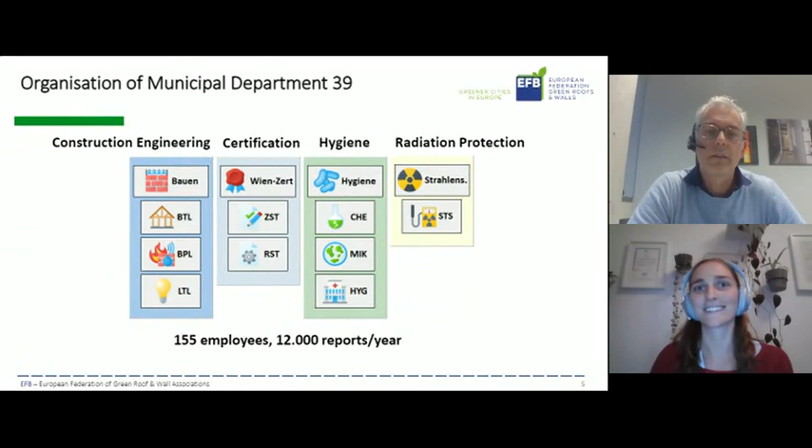I hope it's already working. Yeah, I think so. Yes, and the floor is yours now. Thank you.

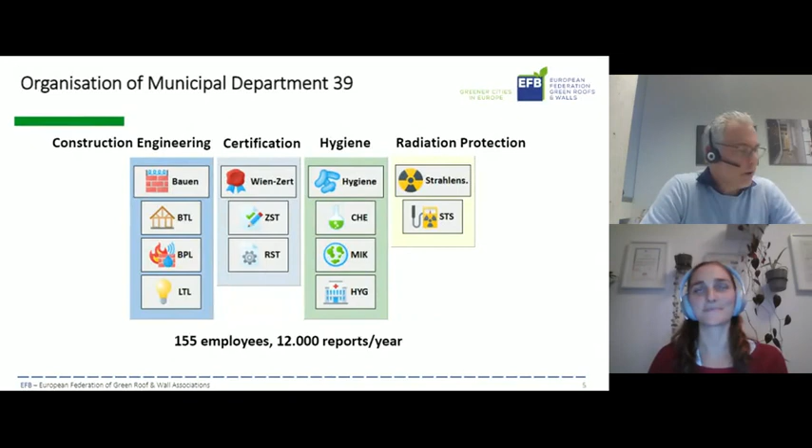Thank you, Isabella. Thank you for the invitation and the chance to talk to you today about such a controversially discussed topic like green walls and fire regulations. First of all...

I may say some sentences about my professional background, about the Municipal Department 39. As you can see, we are part of the City of Vienna administration, but I always say we are a big civil engineering bureau with a very wide range of topics and activities.

Our department is built on 4 columns. Today's relevant column is the construction engineering column, where I am the head of the building physics lab, dealing with fire protection, thermal insulation, and sound insulation - the classical building physics topics.

We also have a testing and inspection department dealing with hygiene topics, which means examining the drinking water of Vienna, for instance, or the water of the Danube. We also have a radiation protection lab dealing with radiation protection, such as X-ray apparatus, and so on.

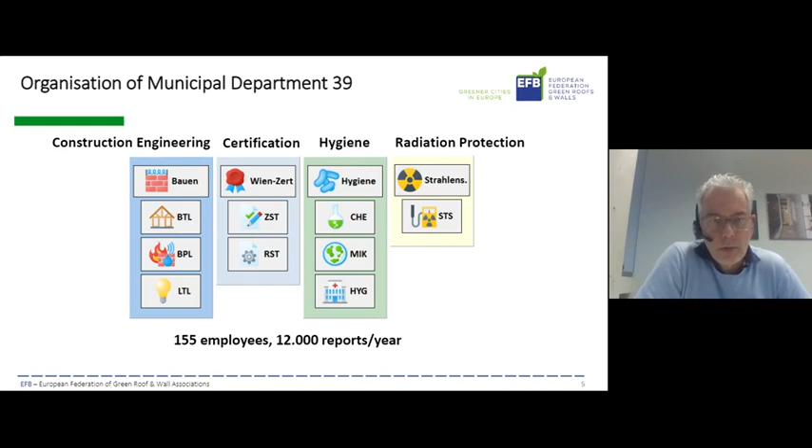So, a very wide range, and this wide range is based on about 800 different test standards, inspection standards, and certification standards. We are accredited for about 800 standards, which shows you a very wide range of activities.

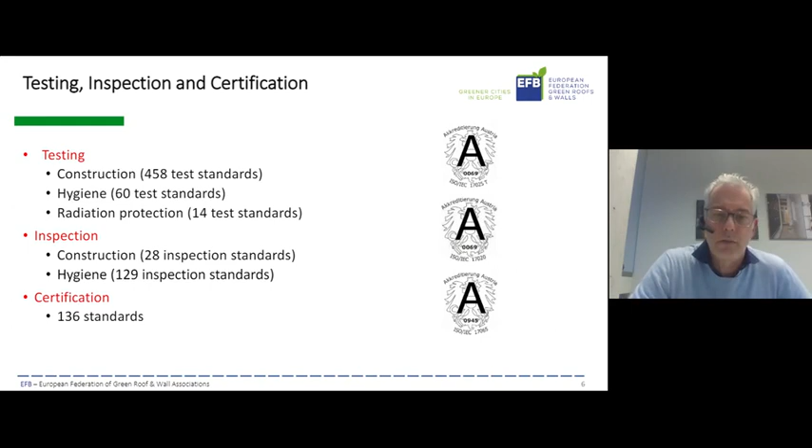Of course, a testing institute has to have a quality management system, an environmental management system, and also has to be a member, for instance, of EGOLF, the organization of fire testing labs in Europe. We are recognized as a testing institute in Germany, for instance, and we have the chairs and participate in numerous national and international panels concerning European standards and national standards.

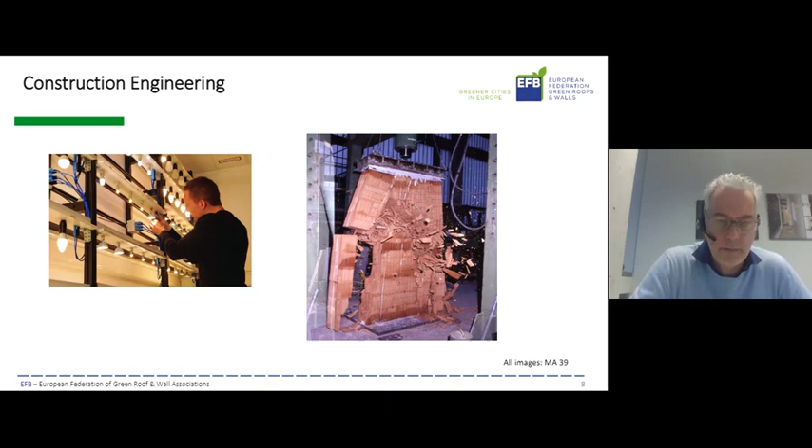Within the construction engineering column, as you have seen in the slides before, we deal with, for instance, lighting technology, the picture on the left-hand side. We deal with strength tests, the image on the right-hand side. And in my lab, as I said before, we have sound insulation, image on the left-hand side, where we test sound absorption and air sound insulation. And on the right-hand side, you see one of our furnaces in the part of fire protection, where we deal with fire resistance of building products. We also test the reaction to fire behavior of building materials.

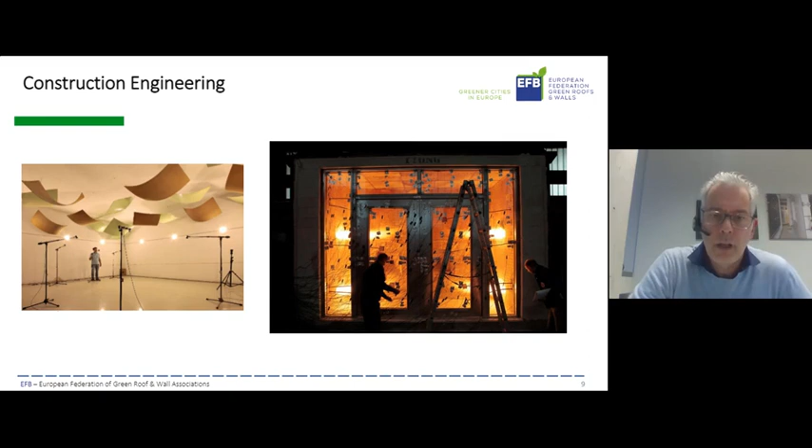Today, our topic is fire and green walls. That will be the content of the next 15-20 minutes. I will show you the history of fire tests of facade greenings in our department, the main results of these tests, and the way from the results to the development of fire regulations in Vienna.

First of all, the history of fire tests concerning green walls, facade greening. This history starts, I would say, in 2015, where the Viennese politics said we have to do something against urban heat islands, we have to do something against climate change. And one means is, of course, to green the city.

So the City of Vienna administration tried to force green walls as one means of that. And in 2015, we as the testing center were asked by the politics, what do you say about the fire behavior of green walls? So we did a short literature research.

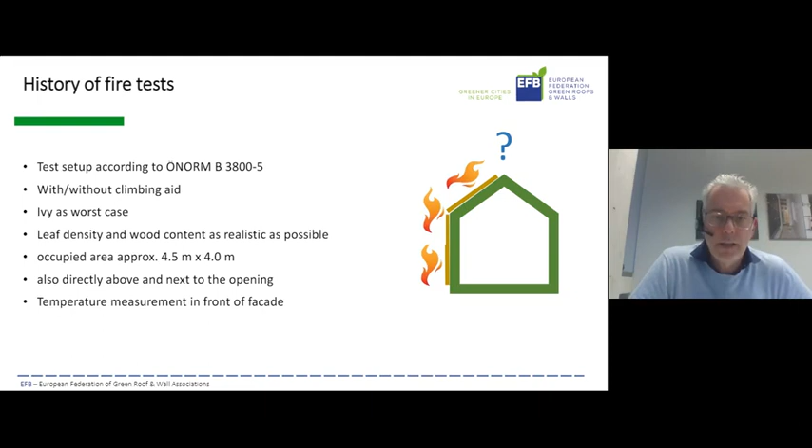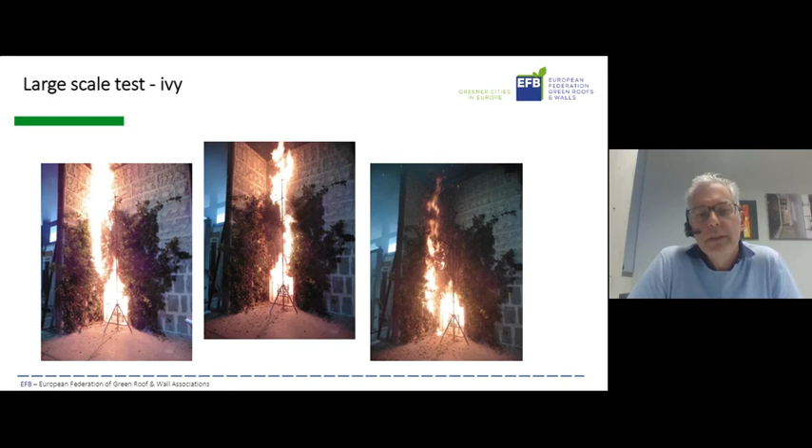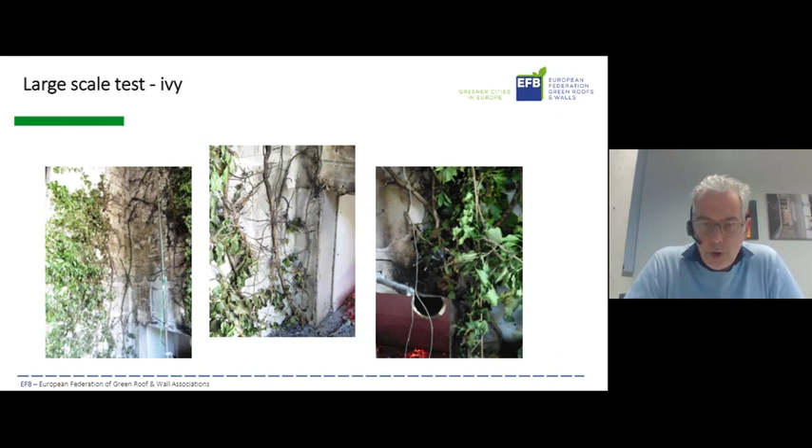So this was the first test, I think worldwide, the first test in a lab on a standard test rig. And it showed us, principally, there is the possibility of such a flashover.

So the solution was not a very easy one for the question the politics asked us, and we had to do further studies. The next examination was in muffle furnaces, some kind of small fire tests, where we put different plants, different woods, different leaves of plants used as facade greenings into such muffle ovens, into such small furnaces.

And then we did some temperature programs within the furnaces and examined properties such as smoke production, smoldering, and ignitability temperature of these plants, these woods, and these leaves.

What was the outcome? What was the result of these small tests? Wooden parts showed an ignition temperature of about approximately 570 degrees, and the leaf masses of the plants showed an ignition temperature of about 650 degrees Celsius.

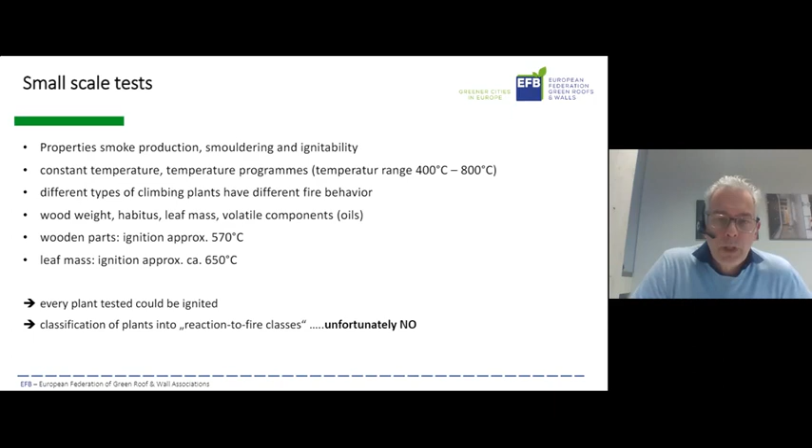So we had to go on with our large-scale tests, and we had the opportunity, with the financial help especially of the City of Vienna, to do 3 major research projects on our large-scale test rig that you have seen before.

The first package was dealing with ivy again, was dealing with plants put onto climbing aids, and was dealing with climbing aids put at various vertical distances from the fire chamber, in front of the fire chamber. You will see the images immediately.

The second research project dealt with ivy and putting in some construction fire barriers. We were also dealing with climbing aids in front of the test rig, as I said before, and we also put metallic trough systems onto the test rig to examine their behavior.

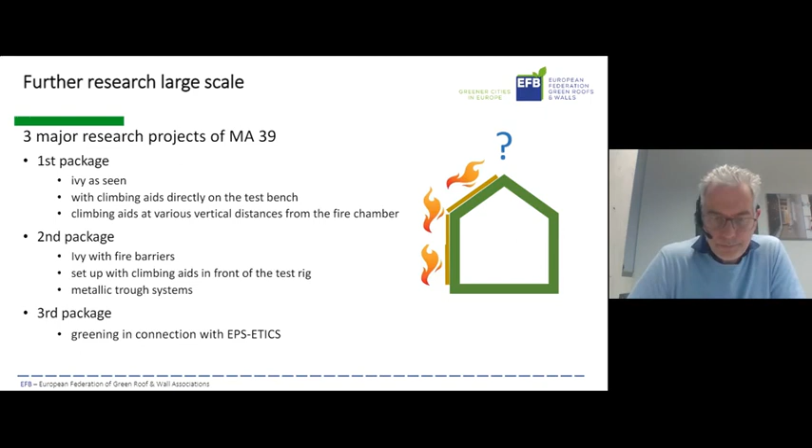And within the third package, which was done in 2021, we examined greening in connection with ETICS systems, with thermal insulation systems onto walls. So let's look at the results.

There you see some images of the fire tests with the climbing aids. Here you see the climbing aids directly mounted onto the test rig, and the plants directly onto the climbing aids. And you see a very similar behavior of the plants as you have seen before with the ivy.

There we also examined this kind of flashover I showed you before. So there's no difference between plants directly put onto the test rig and plants put onto a climbing aid. These climbing aids were made out of steel, and these climbing aids were put onto the test rig. So nearly the same behavior.

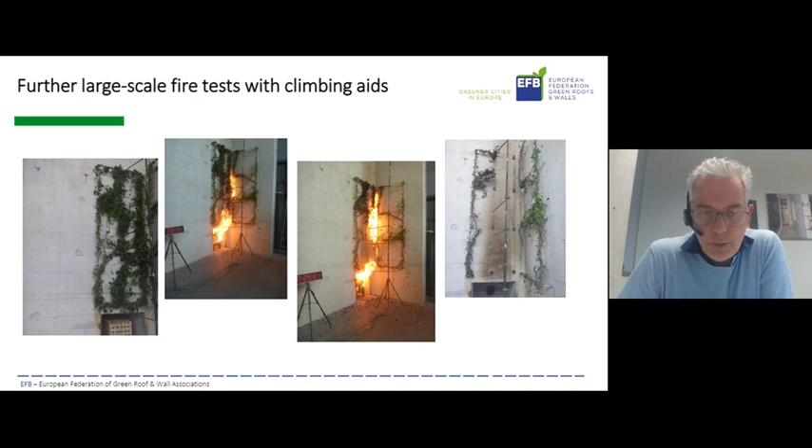Afterwards, we put the climbing aids away from the fire chamber. On these images, you see the climbing aids beginning 1 meter above the fire chamber of our test. You see in the middle the flame of the wooden crib, and the flame now doesn't reach the greening. We do not reach the temperature I've shown you before of 500 to 700 degrees Celsius, so we have no problem with fire propagation or ignition of the greening. Putting away the greening from possible fire loads is one means to possibly fulfill the fire protection goals on facades.

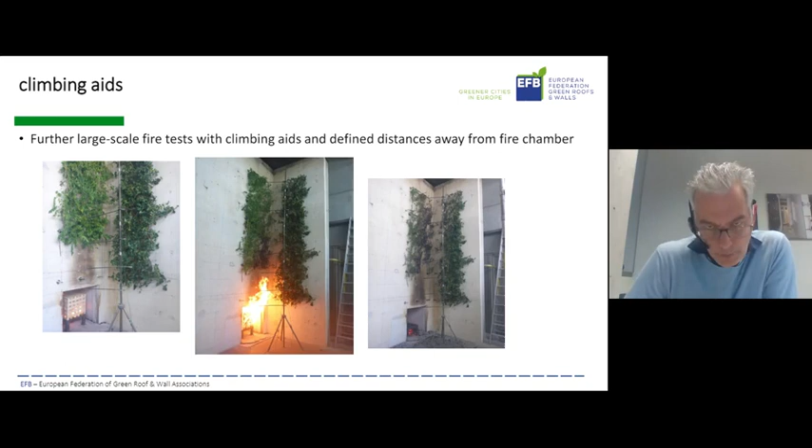Second project: ivy now with fire barriers, made of steel. You see these fire barriers directly above the fire chambers. We have fire barriers made of steel, 1 millimeter thick, with a depth of about 30 centimeters. You see the function of these fire barriers in the image in the middle. The flames are getting away from the facade because of the fire barrier. It deflects the flame away from the greening, away from the facade system, and we have no ignition of the ivy directly placed above the fire barrier.

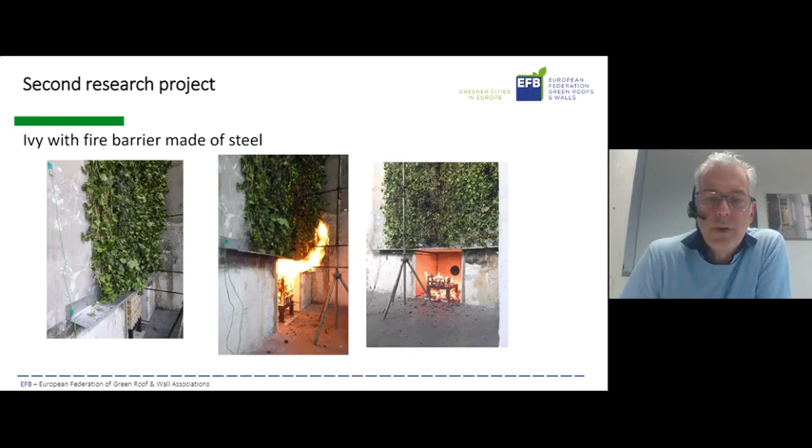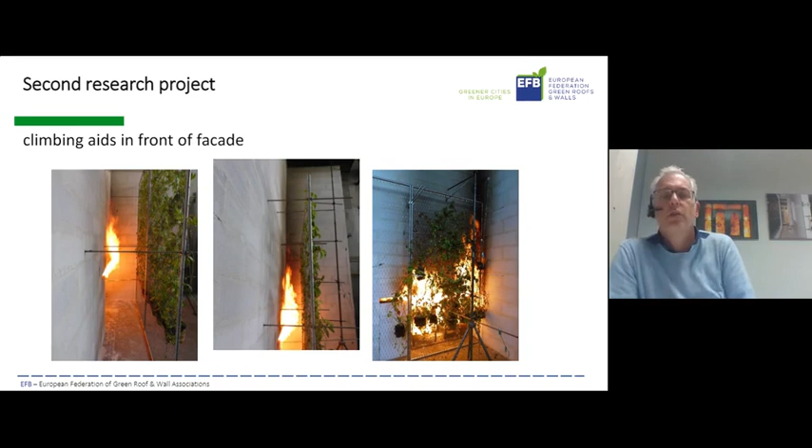So maybe another solution found. These are images from tests with the climbing aids put at different distances from the fire chamber. In the image on the left-hand side, the distance is about 1 meter between the climbing aid and the plants and the fire chamber. In the image in the middle, about 30 centimeters. And in the picture on the right-hand side, about 10 centimeters. As you can see, the 1 meter distance is a very secure and safe solution. The 30 centimeters is maybe a solution, and the 10 centimeters is no solution, because the plants again show these flashover scenes.

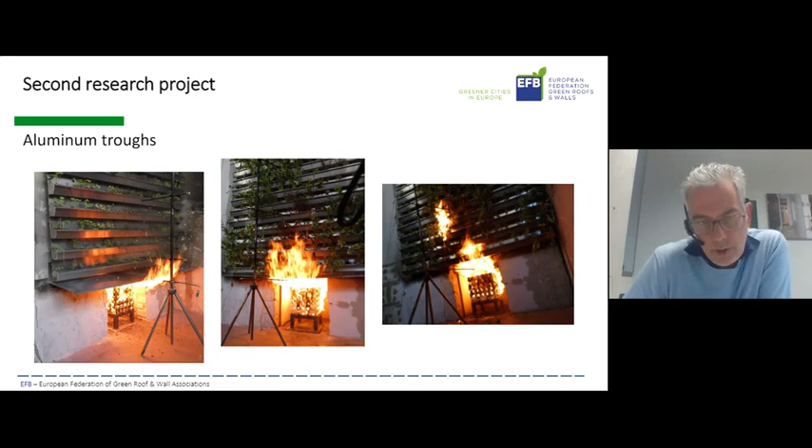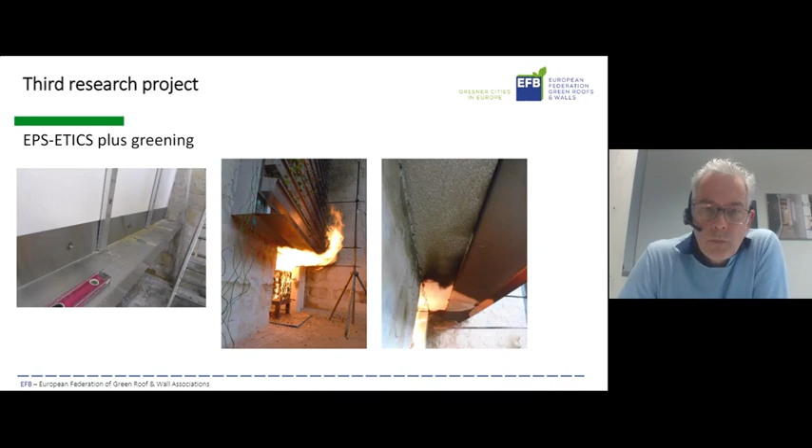As I said before, the third research project is about thermal insulation plus greening. The background idea of these tests was: you have thermal insulation on the building, and afterwards you put greening on it - is there any change in the fire behavior of the ETICS? In the image on the left-hand side, you see the ETICS in white. We mounted the greening system in this test, also a metallic trough system, directly onto the ETICS. On the next slide you see the results. Here you also see tests with the climbing aid at the distances we detected before, now relative to the ETICS, and the distances we examined before are the right distances also when you have an ETICS on the facade. It was also shown that the mounting of the greening doesn't influence the fire behavior of the ETICS in any negative way.

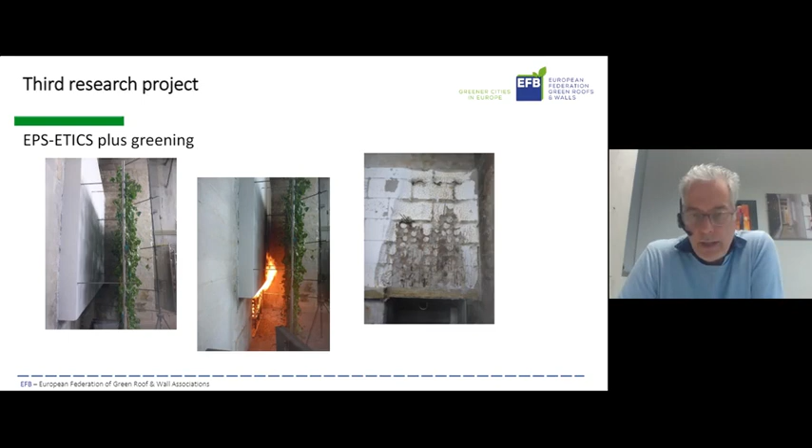From our point of view, the main results were: we have no lateral fire propagation because of the greening. As you see in the image of the ivy, the damage after the test is not even close to the flame directly next to the fire chamber. We have the chance of a vertical spread of fire through a brief, few seconds ignition - as I said before, some kind of flashover - that's possible. Positive: we have no risk of secondary fire from falling burning parts, because in many European countries you also have the fire protection goal of no secondary fire from falling burning parts of the facade systems, so that's not an issue for facade greenings. And we had no indication that greening leads to any deterioration of the ETICS, the thermal insulation system already on the facade.

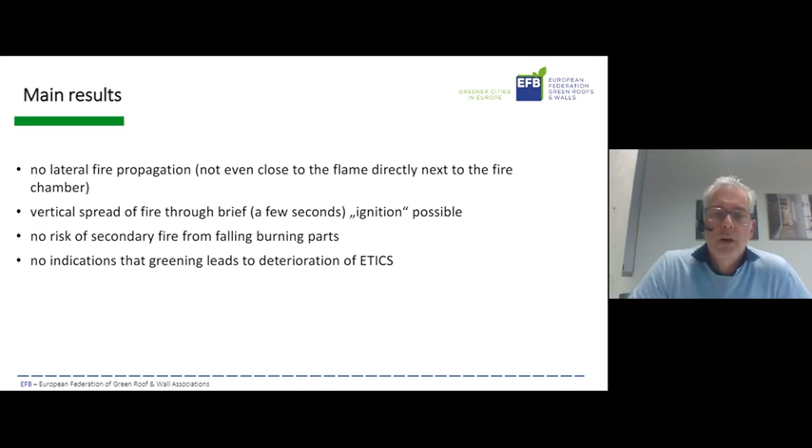And afterwards, after these tests, which were about 25 to 30 tests we have now conducted, we started discussions with other departments of the City of Vienna, especially the Building Authority Department, and of course the Fire Department. We put these main results into some kind of guideline leading to fire regulations.

The regulation consists of two parts. We divide the regulations into those concerning very low buildings and those concerning higher buildings. And that's already the same in all European countries.

So for buildings up to building class 3, which means in Austria nearly 3 stories, no special fire protection measures are necessary. We only have to prove the reaction to fire of the construction, for instance the troughs, the climbing aids - excluding the plants, of course, because plants are no building products, so there's no reaction to fire and no other properties to test. So up to building class 3, no problem, no special fire protection measures.

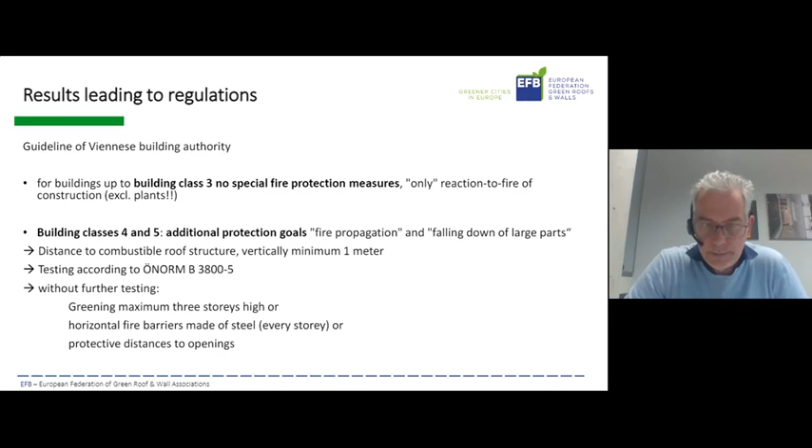So to understand these words better, we also put some images into this fire regulation guideline. On the image on the left-hand side, you see this solution with the fire barriers. You have to have fire barriers with a certain depth in every story, and you see the vertical distance to the roof construction.

If you don't want to put the facade greening directly above the window, no problem, because if a fire exits out of a room onto the facade, the problem is only directly above the window, not left and right. That's the image in the middle. And on the right-hand side, you see the solution with the climbing aids at a certain distance away, for instance from a balcony or a terrace.

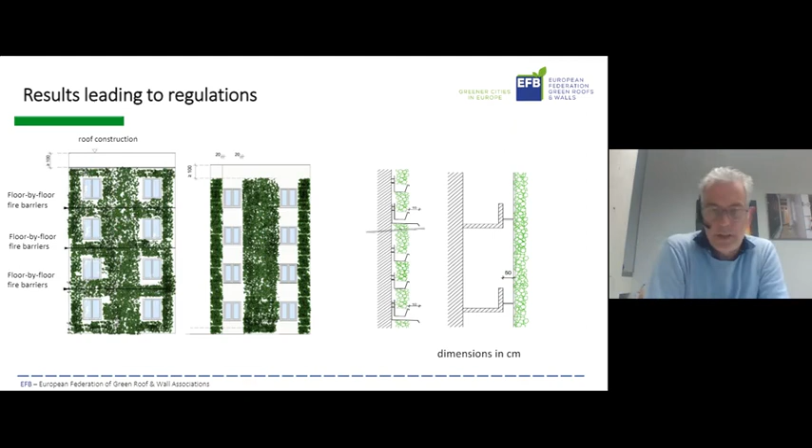And we have also defined a general rule in these regulations: at any time, the facade greening has to be kept in a vital, functional condition. This needs, of course, necessary care measures and the definition of responsibilities. You may now say these are very naive regulations because the definition of responsibility is a very difficult regulation. But it is stated now, and I think that's the only way facade greenings will work in terms of fire safety.

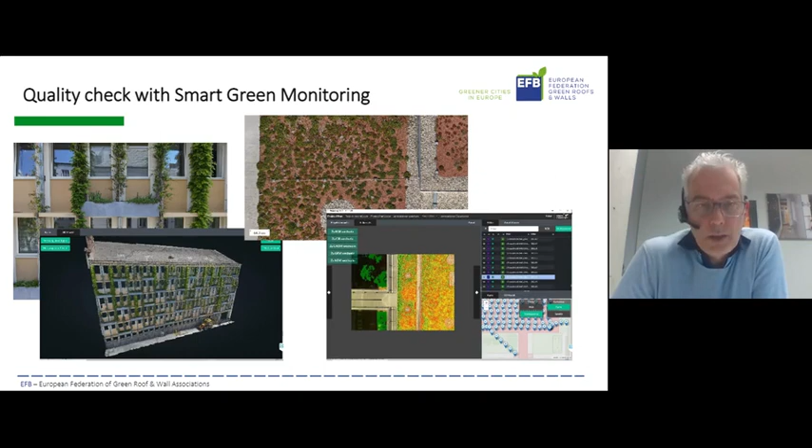And maybe because the argument against this care and these responsibilities is very often the costs of the care of the facade greening in the years after putting it onto the facade, another project of our department is to make quality checks with drones, to lower the costs of monitoring the green facades. That's a very new project our department is now developing and working on.

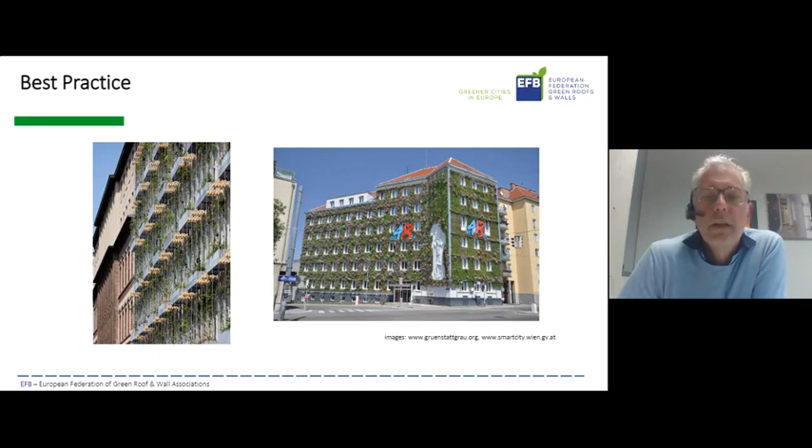And of course, some facade greenings do exist in Vienna. Here you have some images about facade greenings in Vienna: trough systems, climbing aid systems in the picture on the left-hand side, trough system on the right-hand side, and directly wall systems here.

So I think we won't have a Bosco Verticale in Vienna, but I'm quite sure we will have much more of these constructions, much more facade greenings within the next years in Vienna. We need them - there are wide positive effects about facade greenings, but we need them also in a very fire-safe way. And I think we have now created the basis for these fire safety regulations.

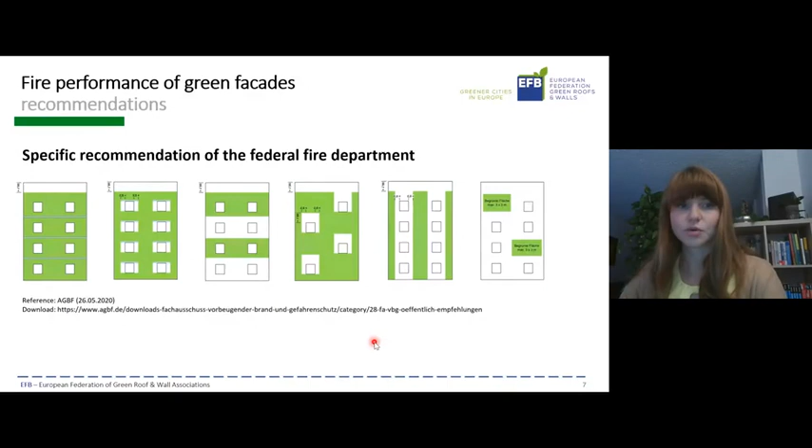So let's see the general recommendation. The conclusion for today is: before we build a green facade in Germany, we have to observe the law, the general recommendation for the greenery, like the maintenance of facade greening, and we have to know the standards for the growth support system. They are usually non-combustible material, like we use, and provisions to prevent fire spreading across ventilated facades, so fire barriers need to be built between the floors.

In the future we will probably have further recommendations. We are working, for example, on systems without any steel sheet fire stops, without any fire barriers, and we want to figure out the impact of greenery on timber facades. That's in process now, so I can tell you what we're doing right now, but unfortunately not many things are published yet. That's why we are in process right now in Germany.